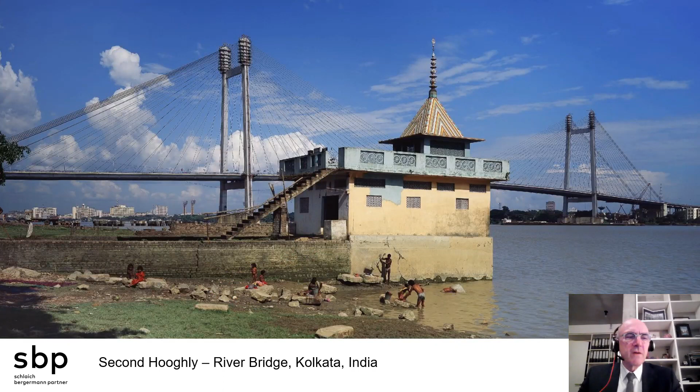You see it on this slide, India's first cable-stayed bridge, back in 1988, together with many Indian colleagues. He also designed the second Hooghly Bridge in Calcutta, now called Vidyasagar Setu. At the time, it was the longest cable-stayed bridge in the world and the first with a steel concrete composite deck. My father took me with him when I was a boy to see the site in 1976.

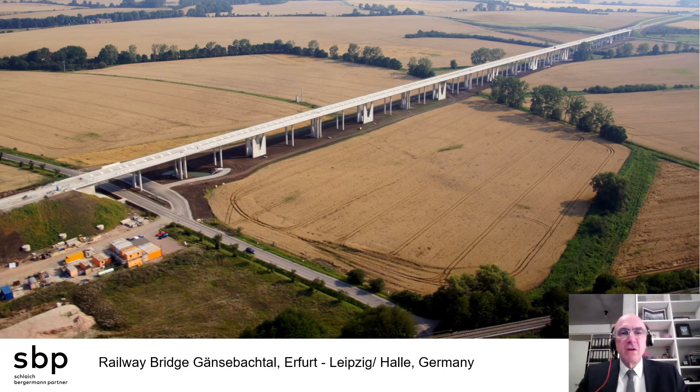We have worked on numerous high-speed rail bridges. Because of German unification, the country had to be stitched together again, and therefore numerous bridges like that had to be built, all concrete, integral, no joints, no bearings, so very durable, slender bridges that obstruct the view as little as possible. Here's another example of one of these integral bridges.

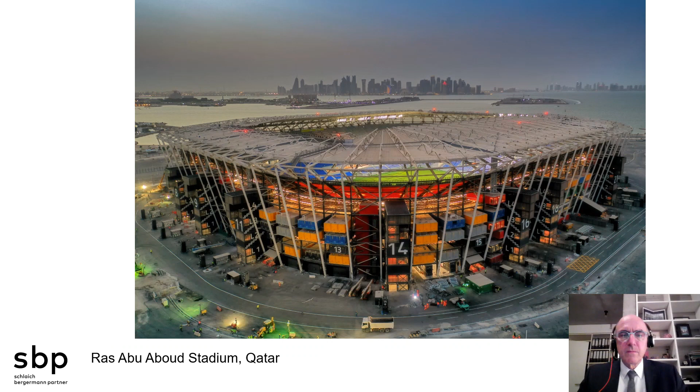There's never standstill, and we are constantly trying to improve sustainability of stadium projects, so that there is legacy. Here's a very nice example of a very recent stadium project for Qatar, for the Soccer World Championship next year in 2022. This stadium is completely made from containers. Containers are brought to site, materials in the containers, and it's used to build the stadium. After the event, everything can be put back into the containers and shipped elsewhere to build another stadium in another place. This is the idea.

I have mentioned solar energy production already, and again, this started with my father's idea. He wrote a little booklet in 1989 titled 'How Much Desert Does a Car Need?' Already at that time, he had thought about using solar energy from the deserts to feed the hungry cities of the world. Ever since then, in our office, we have a department that works on solar thermal power plants, or PV, photovoltaic power plants. This is also a very exciting field for structural engineers, because there is a lot of structure involved to carry mirrors or to carry PV panels.

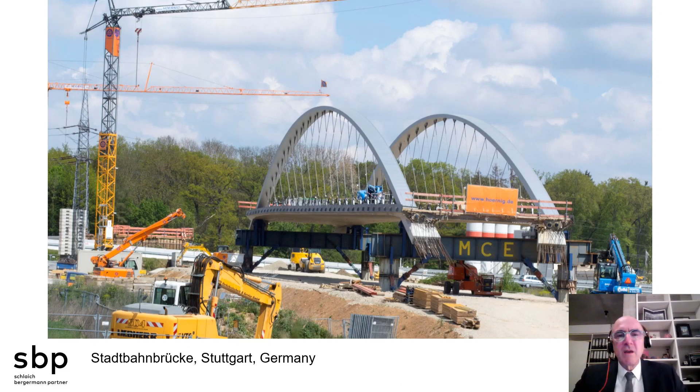We are also investigating the potential of pre- and post-tensioning concrete with carbon fibers. This is done today with steel, but there's the issue of corrosion. If concrete is stressed with these very high strength carbon fibers, which are much stronger than steel, corrosion is not an issue anymore. You need less concrete cover, and therefore these elements can become lighter than conventional ones. You save resources, and the bridges become more elegant.

Now we are trying to make the precast elements even smaller, producing very small concrete components, perhaps only 1 or 2 tons of weight. Naturally, if you put them together you have many joints, but since the stressing material holding these elements together does not corrode, joints where water might get in are not such an issue. So we're working in these areas to see how we can speed up production and construction.

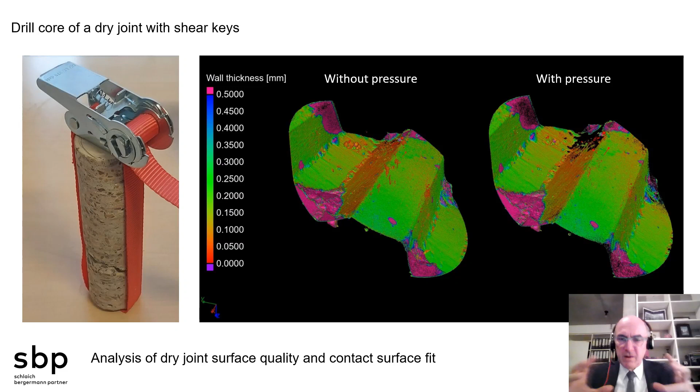This is another example. Two elements are stressed together in a simple way, and with and without pressure the contact surface changes. Again, computer tomography allows us to see how much contact we really have between elements that later have to make sure the bridge works, because these elements, later bigger, will become members of a bridge.

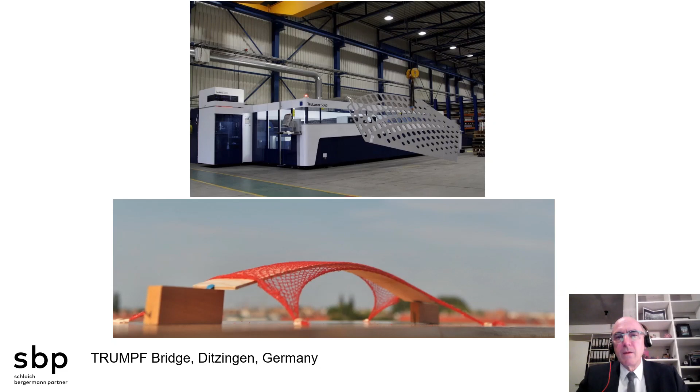The result is a very lightweight shell bridge that can be walked upon directly, very transparent and very stiff due to its double curvature - 30 meters long and only 20 millimeters thick. The holes are not absolutely necessary, but as we've seen before in the model, they show the flow of forces and the distribution of principal normal forces in the shell. So in that sense, there's some didactical quality in this bridge also.

I hope I could give you a quick overview of my work. Civil and structural engineering is a wonderful profession where we can improve our quality of life. It is a vast field of possibilities, from building lightweight bridges to roofs and solar power plants, and there's room for research with new materials and technologies to further improve our built environment.

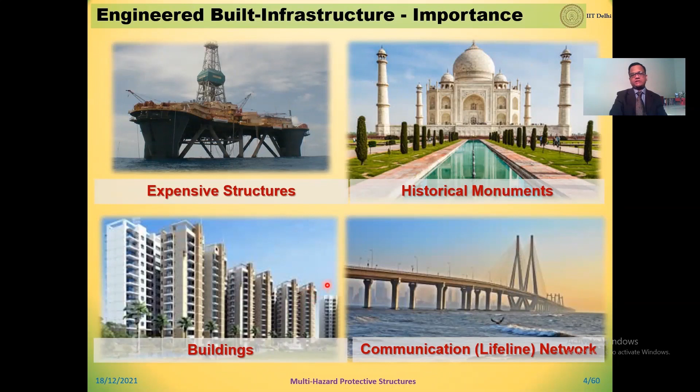Typically, civil engineers, particularly structural engineers, build some of the iconic structures of national importance, for healthcare purposes, or for transportation purposes. This is called the engineered built environment or engineered built infrastructure. I need not separately emphasize the importance of such structures in our daily life, as well as their importance in terms of helping the network, the shelters we receive, and the energy we receive from structures that civil engineers build.

In particular, some of these mega structures' failures are quite devastating, and it might lead to catastrophe in a particular area if some failure occurs. So the importance of these structures cannot be overrated.

However, what we have seen in past events, particularly in India during some infamous earthquakes, is that non-engineered structures have experienced a lot of devastation and destruction, with collapses experienced in this non-engineered built infrastructure.

However, if we look at engineered infrastructure as well, unfortunately there too we have seen, especially during the Bhuj 2001 earthquake, that a number of reinforced concrete structures, which fall in the category of engineered built infrastructure, have collapsed. Not only that, even in other parts of the world, such as in Haiti during the 2010 earthquake, one can easily see that a number of structures have collapsed, and they were actually engineered built infrastructures.

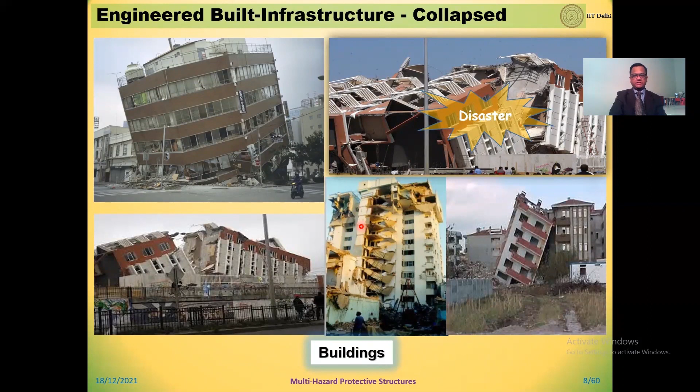So if we look at the past experience of how the built infrastructure has survived or performed during past earthquakes or similar hazards, we see there are a number of failures experienced, whether in building structures, towers, or lifeline structures such as water storage tanks, where effects of earthquake or ground shaking have caused elephant foot buckling, diamond foot buckling due to sloshing, and failures at the top of the tank.

If we talk about lifeline structures such as bridges, even in seismically developed countries such as Japan, we have found that during and after the earthquake, built infrastructure, especially lifeline structures and bridges, has experienced a number of failures, which has hampered rehabilitation activities that are important after any catastrophe or hazard such as an earthquake.

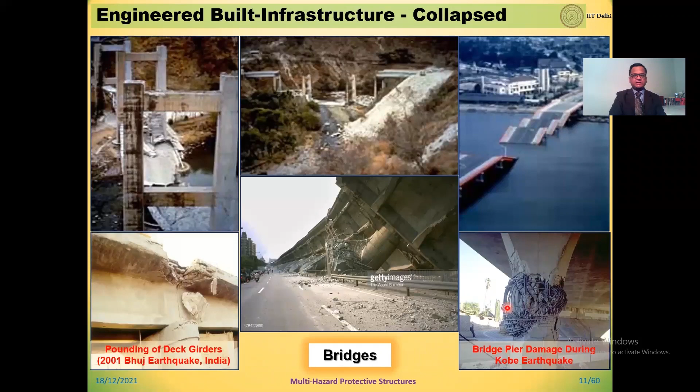Even in the Indian context, during the 2001 Bhuj earthquake, it was found that structures experienced failures similar to those seen during past earthquakes. As you can see, even in other seismically developed countries such as Japan, bridges have experienced significant damages, and some of them have actually failed.

With this background, at IIT Delhi we have focused on protecting structures from the multi-hazards that a structure would experience during its service life. Now, it is argued that wind engineering, earthquake engineering, blast engineering, and fire engineering are independent disciplines in themselves, each requiring rigorous investigation in their respective research problems.

However, our focus is on the structures. During the service life of just one particular structure, it may experience different kinds of loading, emanating from either wind, earthquakes, or man-made or accidental hazards such as blast and fire. Therefore, we have focused on one structure or structural system, with particular materials used therein, exposed to different kinds of either natural hazards or man-made or accidental hazards.

In addition to that, we use some energy dissipating devices in the structures. Typically, we design these kinds of systems for controlling the response of the structure against one particular hazard or one particular dynamic excitation.

However, performance of the structures which are equipped with these kind of devices under some other dynamic events or dynamic loading is typically not looked into, and that is one of the reasons they may not perform as anticipated during those other kinds of excitations. For example, if during ambient conditions the building is subjected to some vibration because of construction activities going around, these devices which have been put in place in the buildings or other structures, we typically do not look into how their behavior has been.

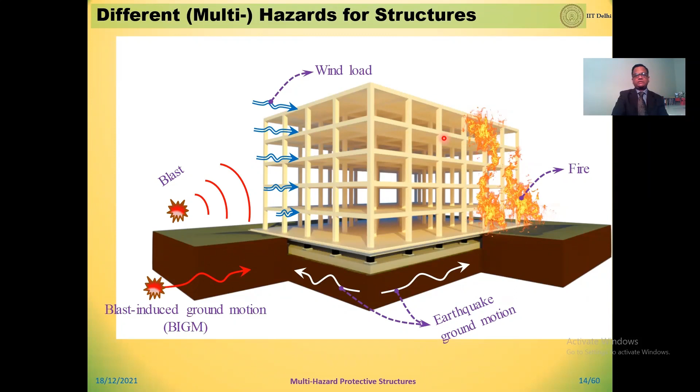With this, we have looked into defining a research problem around this to address this need of finding out the vulnerability and the risk associated with the built infrastructure when it is subjected to different kinds of hazards. And those hazards we have quantified at a particular location, and therefore what we have investigated is the site-specific and scenario-based analysis and design of the structures subjected to different kinds of multi-hazard, and finding out if the desired factor of safety is achieved during its service life or during its design life.

For that matter, we have considered some prominent hazards in our investigation, such as earthquakes, wind, and accidental hazards, blast and fire. It is also important to note that a number of new materials are being introduced for built infrastructure, and it is important to investigate their performance when they are exposed to some of these kinds of events.

Also, the structural systems, the built form or the shape of the structures are also being very different in nature. For example, there are some long cantilevers with larger spans being built even in seismically prone areas. So these are some aesthetical architectural requirements, and as a structural engineer, it is essential to meet some of those requirements of building the structures.

If we look into the effects of these different hazards on structures built with advanced engineered materials, we understand that there is some interacting effect between these responses of the structure. For example, it is very well understood that in order to build blast resistant structures, more the mass, better it is in terms of blast resistance. On the contrary, if we talk about earthquake resistance of structures, lesser the mass, lesser is the inertial forces that it will attract.

It means that there are contradictory requirements in the design of earthquake resistant structures and blast resistant structures. On similar lines, if we compare between the demand of earthquake resistant structures and wind resistant structures, typically if we elongate the time period of the structures, it means if we make them more and more flexible, then the earthquake response can be reduced down. However, flexible structures, as we know, are more prone to the wind hazard when they are exposed to wind load.

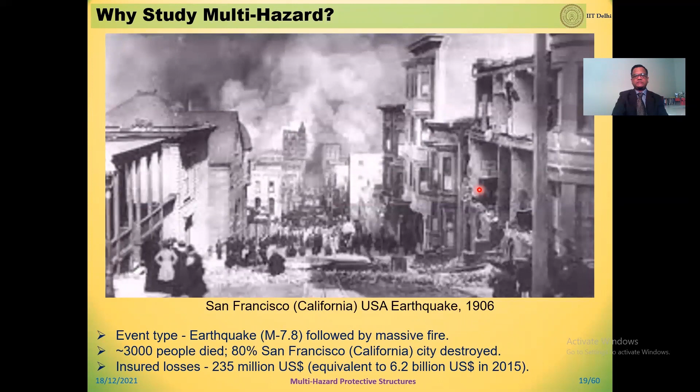This is because of the cascading effect of both these hazards, earthquake and fire. However, we are yet to learn the lesson. In 1994 also, during the Northridge earthquake, a number of such incidences were seen where earthquakes have occurred. A structure, if designed properly, may perform satisfactorily under earthquake excitation. However, when it is subsequently subjected to loading from a fire event, it may not have the same performance as the intact or undamaged structure. So that kind of philosophy is required in our design practices.

All of us have experienced or seen the Fukushima Daiichi nuclear disaster in 2011. There were a series of hazardous events, starting from earthquake, then tsunami, then fire hazard, and then of course the nuclear disaster.

Apart from that, in 2015, the I-10 bridge connecting California and Arizona states failed because of two subsequent events: heavy rains that followed Hurricane Dolores, and because of the heavy rain there was flooding, and because of the flooding the riverbed material was washed away, causing scouring, which led to the falling of one of the spans in this bridge.

If we look closer into these kinds of problems in bridge infrastructure, what we observe is, for example, the as-built structure during the design stage has a pile cap which has been designed, and beyond that there is a pier and then a pier cap. Now, the length considered for the design by the structural designer might be from the pile cap up to the pier cap.

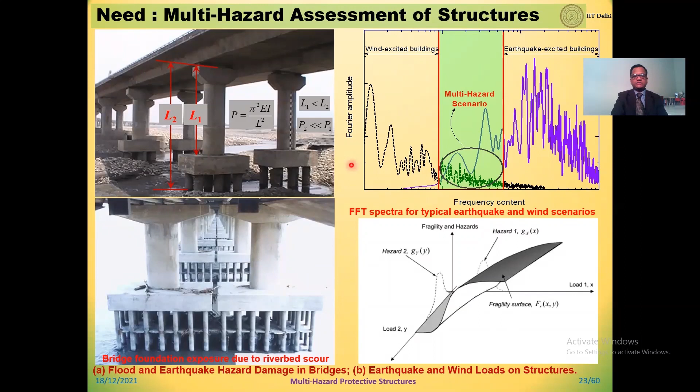Apart from that, there are some other accidental events, such as the blast that happened in Dombivli, which was followed by fire, and here 47 people died and more than 200 were injured. Again, this is a fire-following-blast kind of event that took place in a Mumbai factory during 2016.

Also in 2016, on the southern coast of America, in Florida, structures experienced heavy wind loading, then there was a storm surge followed by flood, and also some events of fire. In this multi-hazard event, more than 1650 fatalities were reported and a lot of loss occurred because of the multi-hazard events.

If we see accidental hazards across the world, a number of events took place, in thousands per year in different years. In terms of cost, looking at the top costliest world insurance losses, we can see that in most cases they are not a single hazard, but the top 10 costliest multi-hazard events in the world.

If we focus more on the Indian context, the National Building Code of India in 2016 has already included this multi-hazard map of India, which reports that mostly the northern part of India, bordering Nepal, especially the Bihar state, is more prone to multi-hazard risk. It has been reported that 19% of the world's land cover is exposed to a single hazard, and more than 50% of the world's population is affected because of that single hazard.

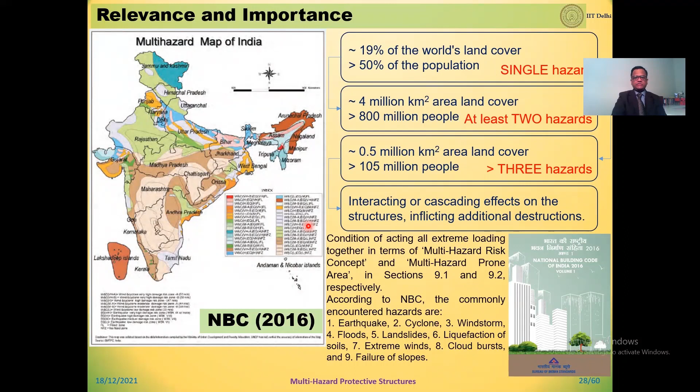However, two hazards affect 4 million square kilometers of land cover and more than 800 million people. And if there are three or more hazards, then 0.5 million square kilometers of land cover is affected, and more than 105 million people are affected. These hazards have interacting or cascading effects, and thereby we need to ensure that our structures are protected from these hazards so that we can save invaluable human life.

I would like to highlight that we distinguish multi-hazards into three categories: one, independent hazards A and B and their independent effects on a structure during its lifetime; second, triggering events such as cascading hazards; and third, simultaneous occurrence of different hazards where there will obviously be interaction. In such cases, we need to identify the challenges involved in design and how to mitigate the response of the structure subjected to these mutually interacting and interrelated effects.

In that, we need to define structural safety on some innovative scale, and this requires the involvement of structural designers, code writers, and other stakeholders in order to ensure that we have a multi-hazard resilient society.

So here, the hypothesis we make is that multi-hazard risk analysis is not just the sum of single hazard or risk analysis. If we look into other designs of structures such as dam structures or offshore structures, some of these conditions have been considered, though not so per se in the realm of multi-hazard protection of structures.

For example, during the Oklahoma City bombing, there was a blast followed by a fire. Had that building been designed using the multi-hazard concept, probably the destruction experienced might be lower, and the structure might have been usable even after these two deadliest events followed each other.

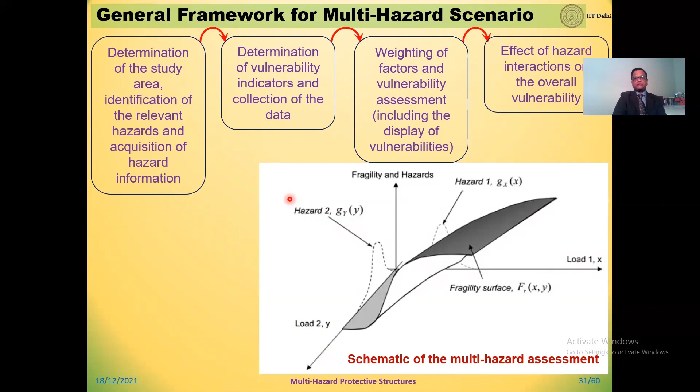So essentially, we would like to develop our structures based on the probabilities of occurrence of hazardous events to ensure we account for multi-hazardous events. In order to do that, we carry out an assessment of structures on a probabilistic scale to check how fragile they are for different kinds of events.

In that context, at IIT Delhi, in the multi-hazard protective structures laboratory, we have developed some analysis frameworks and procedures, and some of them I will quickly highlight.

For example, we have considered some multi-story mid-rise to high-rise buildings, subjected them to site-specific earthquake scenario events and some wind loading events, and checked their responses, whether they are prone to failure, and what the probabilities of failure are.

We started with a fundamental understanding of the single degree of freedom system response when subjected to earthquake or wind kind of loading. I say wind kind of loading because we considered sinusoidal excitation, categorized into base excitation and mass excitation. However, while inputting these excitations, we ensured that the total energy imparted to the structures is more or less the same.

So as you can see in the time history, the total energy imparted on the structure is similar. However, the response of the structure is much different. Now, if we talk about designing a structure against earthquake versus against wind, its response for similar input energy is significantly different.

If we look at this on the stochastic scale and check the fragility of the structures, it is seen that they are more fragile to base excitation relatively compared to wind excitation. So we took intensity parameters such as excitation frequency, peak acceleration, and mean wind speed, and where external excitation frequencies changed, we found that their vulnerabilities are significantly different from one another.

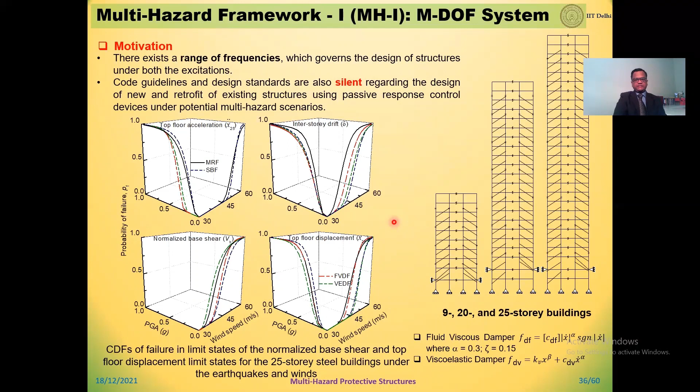If we see the vulnerability on a similar scale in terms of either top floor acceleration, story drift, or top floor displacement for different intensities of earthquakes and wind, either with or without energy dissipation devices, we again see significant difference in terms of performance. However, typically we do not design structures to take care of both response reductions simultaneously, for earthquake loading and wind loading.

We have found that there is a bandwidth of frequencies within which multiple hazards affect structures, and structures whose frequencies lie within this bandwidth are more susceptible to different kinds of aerodynamic events. We have analyzed some real-life industrial structures and seen that providing bracing or not significantly changes the response of the structure.

In yet another real-life study, we proposed a new analysis procedure to analyze the performance of a real-life base isolated structure built in the Aichi prefecture in Japan. This base isolated building is about 4 stories high, with base isolations provided at the bottom, in the basement floor. We have taken into account the non-linearities in the isolation system and modeled a 3D base isolated building.

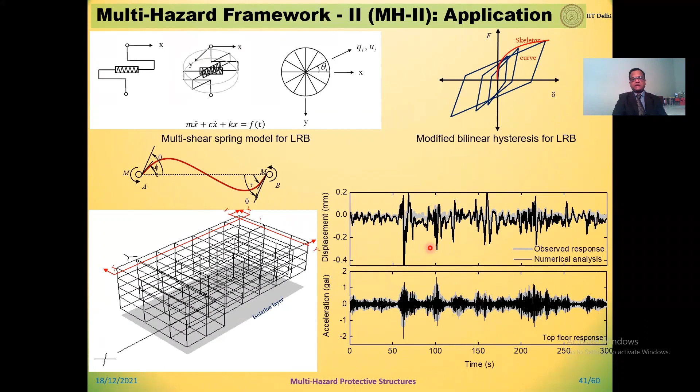First, the data available for measuring the response of the building, which is being continuously monitored there, was compared with our simulation results, and we were able to predict the response of the structure under the action of both earthquakes and ambient wind.

Then we developed a framework for generating a timeline of earthquake and wind events during the design life of the structure, obviously based on probability. We developed it for the first hazard, say earthquake, and similarly repeated it for the second hazard, which is wind.

While developing these time histories for the design life of the structure for earthquakes and wind, since it is a random problem with different possibilities, we considered some of these cases to simulate the wind loading and earthquake loading on the structure happening at different durations, depending on the return period considered.

So this is the designed structure as built initially. Over a design period of, say, 100 years, we subjected it to some wind events and some earthquake events in different cases and intensities, and checked how these multi-hazard events affect the probability of failure of the structures.

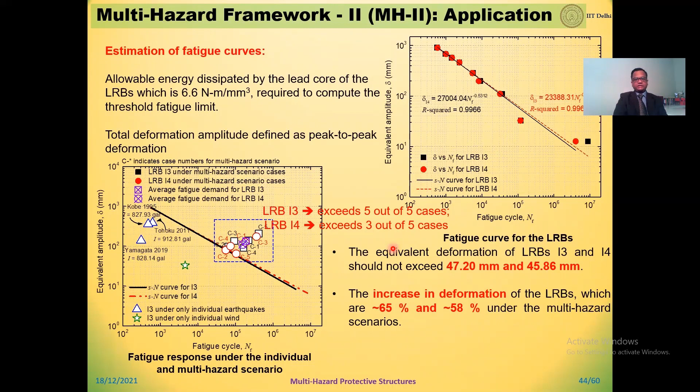This revelation led us to the conclusion that these isolation systems incorporated in the structures may not perform as designed, especially after a few years of their installation.

For example, here we are seeing the displacement of the structure against the earthquake and wind, site-specific earthquake and wind. In the case of wind, there is of course a zero non-wind oscillation, and thereby the force developed in the isolator is not comparable with that in the case of earthquake. So the full development of the force-deformation loop has not been possible in the case of wind.

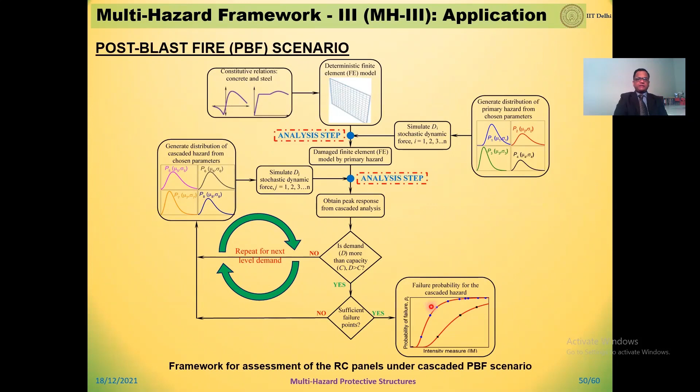The other multi-hazard problems we have solved are, for example, fire following earthquake or fire following blast. First, the post-blast fire scenario: we developed an analysis framework wherein we analyzed structures exposed first to the blast event and then followed by a fire event, and checked how vulnerable they are, whether the events happen independently or one after the other.

This is a real-life structure that we considered. First it is subjected to blast loading, and then to some fire loading. This is a scenario definition for blast and fire events, with nonlinear parameters considered, dependent on temperature as well as rate of application of load—high strain rate parameters for the materials used in these structures.

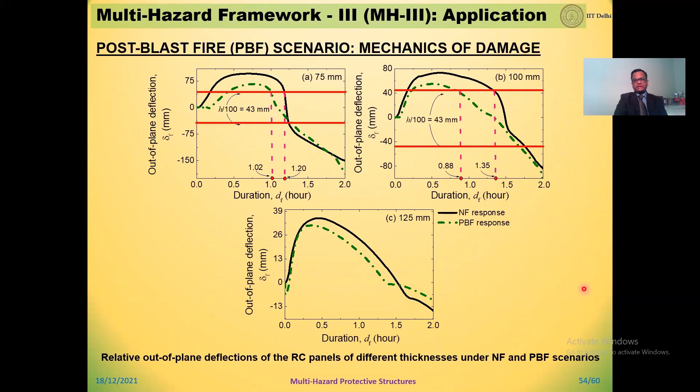What we found is that the behavior is substantially different if only one event takes place at a time, compared to a cascading post-blast fire event.

Looking at the past, earthquake-triggered fire events, there are a number of such events which have happened historically, as I mentioned earlier. In the 1906 San Francisco earthquake, more than 3,000 people lost their lives because of the fire that followed the earthquake. So we have again analyzed some real-life structures subjected to post-earthquake fire scenarios.

What we have found is if the damaged structure is exposed to fire, the response is much more vulnerable as compared to an undamaged structure. So we have found the fragility or vulnerability of structures when they are exposed to these two different kinds of events following one another.

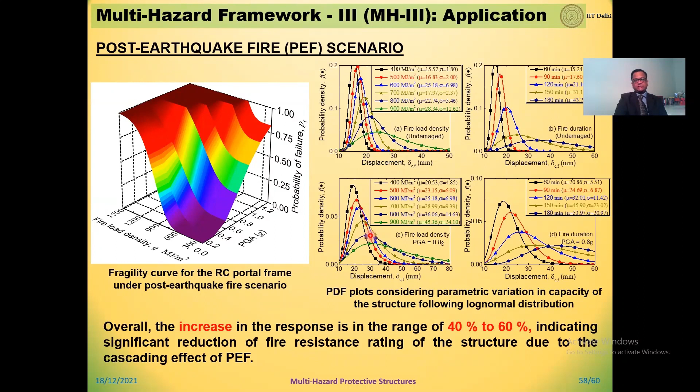The first is the earthquake, and then the earthquake triggers the fire. We have found that structures become more vulnerable if they are exposed to this cascading fire event after an earthquake. Now, conventionally, these are the analysis steps that we follow for designing structures.

However, we have augmented that with the multi-hazard loading concept, with an equivalent multi-hazard load applied on the structures in order to carry out multi-hazard analysis and design. To carry out this analysis, first we need to define the different kinds of hazards that the structure will experience during its service life, and then incorporate that into our day-to-day analysis and design.

This part of the analysis steps in structural design has been published in the Current Science journal. For details, one may look at that publication.

So we have converted this conventional structural analysis and design procedure, adding particularly the site-specific conditions and scenario-based conditions, both deterministic or possibilistic and probabilistic or stochastic. Finally, what we would like to arrive at is some multi-hazard approaches for analysis and design of structures in order to improve their multi-hazard resilience.

We have been carrying out this work at the Multi-Hazard Protective Structures Laboratory at the Department of Civil Engineering, which was established in 2009 with this name. There are a number of recommendations we have made based on some of these investigations.

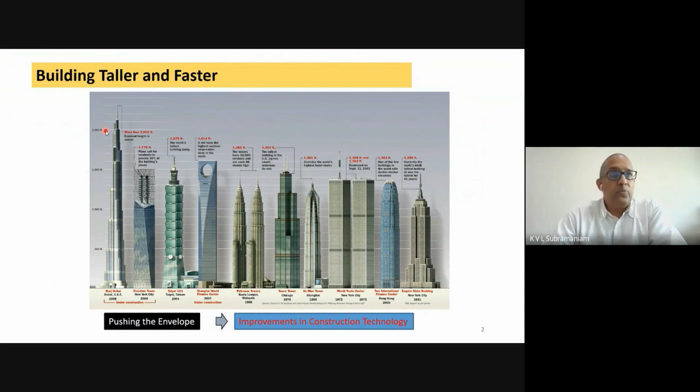Starting from the 1930s to the current day scenario, buildings have gotten taller, and this has been possible because of steady improvement in construction technology. In specific, concrete buildings have started taking a major share of super tall buildings, to the point that in 2018, 63% of super tall buildings were primarily made of concrete, with concrete structural elements and structural systems.

This has been possible because of a steady improvement in concrete technology, which has led to an increase in concrete strength. Today, we are able to deliver concrete with very high strength, which is pumpable to great heights, with steady improvement in construction techniques. As a material, concrete is sustainable and affordable compared to the alternatives available.

Now, the challenges in concrete construction today include speed. What limits fast, rapid construction using concrete is the way concrete is formed at site. Concrete is poured into formwork assembled on site, and it requires vibration and mechanical intervention to be compacted into the gaps within the formwork.

The formwork is removed after the concrete gains strength, and concrete takes the shape of the formwork. This entire process delays the construction of concrete structures due to the time required for assembly of the formwork.

The other challenge we face with concrete is that forming on site limits us to using rectilinear shapes. Most shapes that we can form on site using formwork are limited to rectangular, or where we use other shapes, it's restricted to simple shapes like I or T shapes.

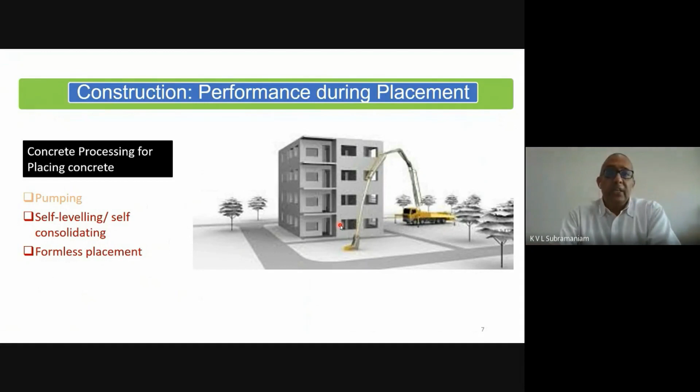Just to illustrate the advancement in pumping technology, concrete in the Burj Khalifa tower in Dubai was pumped 600 meters and delivered to be placed at that height. This required significant advancement in pumping technology and the pumps used. In addition, the material had to be engineered to withstand the pressures so that it would flow in the pipe when in a highly pressurized state, come out of the nozzle, remain in an unsegregated state, and fill the formwork.

Just to illustrate the material-level challenge in placement and forming of concrete: concrete is a suspension made of aggregate in a cement paste matrix. Aggregates themselves are graded - we have coarse aggregate and fine aggregate which pack to produce a dense matrix, and the gaps between the aggregate are filled with cement paste. The cement provides the glue which bonds the aggregate together when concrete hardens, producing a structural material because of the chemical reaction between cement and water.

So if you look at the flow property of concrete, we need to look at the rheology of the paste. Cement paste is the medium, the matrix in which the aggregate are suspended. So we also have to look at aggregate packing. By engineering these two, we should be able to produce concrete with the desired flow property.

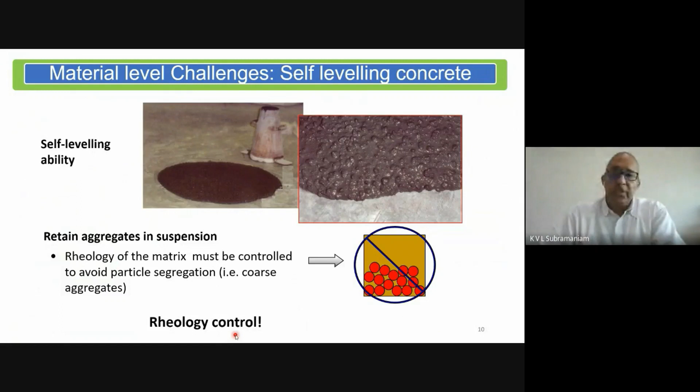To produce concrete with self-leveling ability requires concrete to flow under its own weight. The biggest challenge is to have concrete that flows while keeping aggregate in suspension. And of course, that calls for rheology control of the binder paste and attention to packing of the aggregate.

Coming to rheology of the cement paste, this plays a vital role in determining the flow of concrete. The rheological properties of the cement paste are obtained by studying its shear behavior. When cement paste is sheared, we need to understand the flow behavior - what is required to initiate flow and then to sustain the flow. When cement paste is sheared, it exhibits a response where initially, as shear strain is applied, it offers resistance, and the resistance to increasing shear strain increases up until it reaches a maximum, identified as yield stress. If strain is increased beyond the yield stress, the resistance decreases, and eventually it attains a steady state.

The increase in resistance from the cement paste occurs because cement paste is a suspension of cement grains and water. The cement grains often exist in a percolated network, which offers resistance to the applied shear. Initially, on applying shear stress, the percolated network densifies and offers increasing resistance to applied shear strain. Eventually, once the applied strain exceeds a threshold value, the network is disrupted, the resistance from the internal structure is overcome, and we get flow within the cement paste.

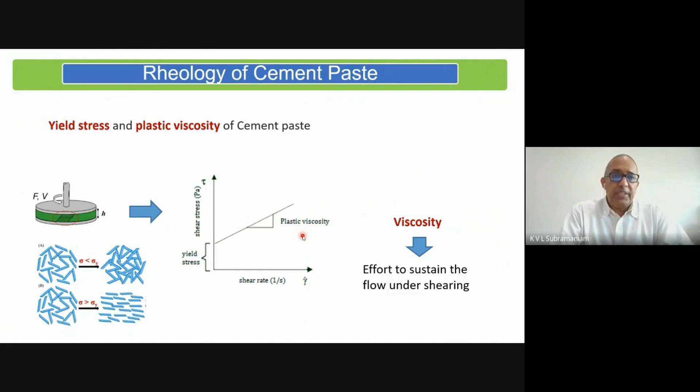Viscosity defines the effort required to sustain the flow in a fluid medium. In this case, we are dealing with cement paste, which is a particulate suspension of cement grains in water. Now, viscosity and yield stress play roles in the different conditions of the concrete.

So when we have an aggregate held in suspension of cement paste, and if the concrete is in the at-rest condition, considering the equilibrium of forces, the restoring force for the aggregate comes from the yield stress of the cement paste. The yield stress of the cement paste provides the force that keeps the aggregate in suspension when the concrete is in a static or at-rest condition.

When the concrete is in flow, in the dynamic condition, the drag force which comes about from the viscosity of the cement paste comes into play in the equilibrium of the aggregate particle. Therefore, both yield stress and viscosity become important in determining the state of the aggregate in suspension when the concrete is at rest or in the flow condition.

Of course, we can manipulate the yield stress of the cement paste using engineered polymers known as high-range water reducers, which typically have a backbone and a comb teeth-like structure. These adhere to the cement grains and essentially create a deflocculation of the cement grain structure through physical or steric repulsion between the grains, allowing us to induce flow. The effort required to produce flow in cement paste is reduced significantly with the addition of water reducers.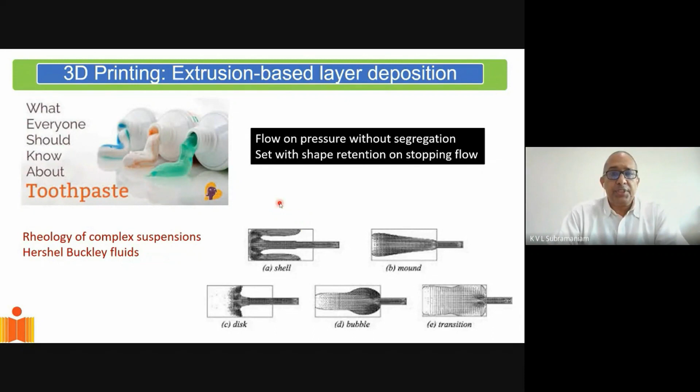Now, extrusion-based printing of concrete would require a balance of three terms. First is pumpability, where the concrete should have the ability to be pumped out of the pipe without clogging and segregation. This requires that the concrete itself should have low viscosity and it should not allow phase separation. The material should remain homogeneous under pressure.

It should allow shape retention. Once it comes out of the nozzle, it should keep the shape with which it was extruded. That requires concrete to have a high yield stress and thixotropy.

Then it should allow buildability, which means it should allow stacking of layers one on top of the other to assemble the entire structure. This means the internal structure should build up very rapidly within the material once it has been deposited. So to do this, we need a material with high yield stress, low viscosity, and high thixotropy. These are the three rheological properties that have to be balanced in the concrete.

Just to illustrate, we need a material with high yield stress and low viscosity. The effort required to initiate flow should be high, so it will keep its shape once extruded. Then it should have low viscosity so that while it's being pumped, it's able to be pumped with low effort.

And then it should allow stacking of multiple layers. That means the lower layers which have already been deposited, the structure development in those layers should allow them to take the weight of additional layers coming on top.

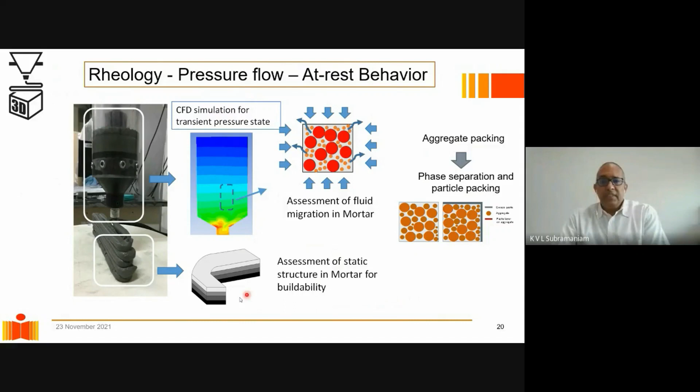And once the material has been deposited, we require the internal structure to build up to be able to sustain the weight of additional layers.

To achieve this build-up, we have to look at the property called thixotropy. Thixotropy means once we shear the material and hold the shear stress constant, the structure breaks down. The resistance of the material breaks down because it gets deflocculated. Then if we remove the shear stress, the internal structure should build up and start offering resistance to shear stress again. Materials which are thixotropic are able to build up very rapidly after applied stress.

We found that nanoclays help us improve the thixotropy of cement paste. If added in small quantity, at rest the nanoclay exists in a very flocculated structure. When sheared, the flocculated structure breaks down, so it doesn't impact the viscosity, it flows. Once it is again brought to rest after shearing, it is able to build up the structure, which allows the material to withstand shear stress again.

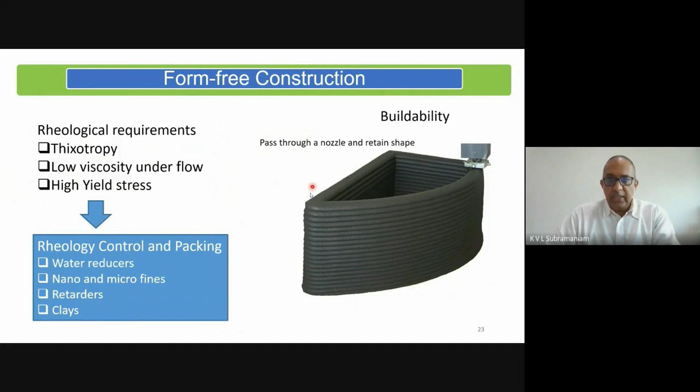With this, we were able to develop concrete mixtures with an understanding of the rheology and packing of aggregate within the mixture, which could be printed by layer deposition. This is an example of a structure printed to 1 meter height, made with aggregate in suspension in cement paste — a 3D printed concrete structure with a complex shape.

So I would like to conclude by saying concrete for improved requirements of delivery and placement requires engineering which considers multi-scale linking between paste and concrete rheology. Rheology control of the binder paste is essential to deliver or control the flow behavior of concrete. Then multi-phase analysis, which includes packing of solids, is required to engineer concrete with the desired flow characteristics. Thank you.

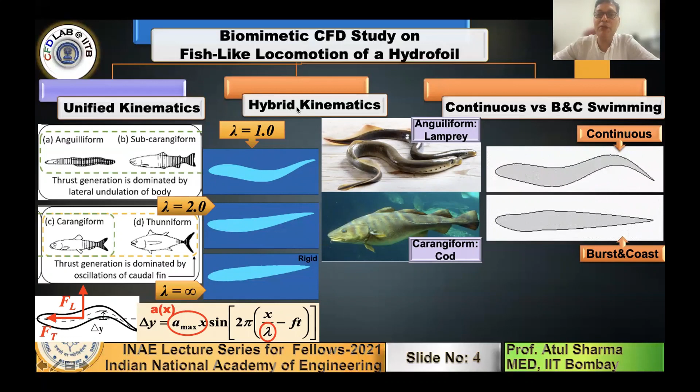In nature, carangiform fishes—the thicker fish type—have been found to swim differently when traveling long distances to save energy. This is called burst and coast swimming: they undulate their body for one cycle, then rest for one cycle, then undulate again, creating alternate acceleration and deceleration. This leads to energy saving over long distances, although it increases travel time. I'll present results for unified kinematics, hybrid kinematics, and continuous versus burst and coast swimming.

We have also compared the flow patterns corresponding to the low lambda undulating motion and the larger lambda pitching motion, where the larger thrust coefficient corresponds to stronger vortex generations.

In CFD, we generate movies where the actor is the velocity and vorticity, or the pressure. The characters of these fluid dynamic movies are phenomena like boundary layer, flow separation, and vortex formation. We try to correlate this scientifically exciting movie with an engineering relevant movie to make up a story that has both scientific and engineering relevance.

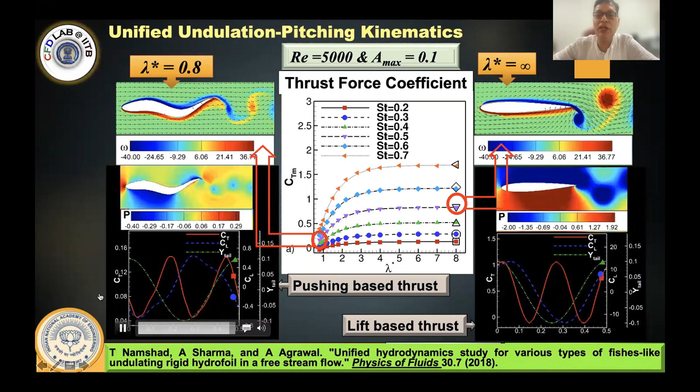For the hybrid kinematics, it has been found in nature that carangiform fishes use lambda equals 1 for body undulation. Anguilliform fishes normally use lambda equals 0.65. But as per need, when it has to increase speed, anguilliform fishes increase lambda from 0.65 to 1.

So here we are studying adaptation of the lambda and amplitude envelope separately as well as together. Since anguilliform fish are thinner and carangiform fish are thicker, we have taken data from the literature where people have experimentally documented the ratio of thickness to length, and we have mapped those fineness ratios with appropriate thin and thick NACA hydrofoils, as shown here.

We have considered adaptation for anguilliform fishes using lambda equals 0.65 with this amplitude envelope. When you consider ACA, this means anguilliform fish is using a larger lambda. When you have ACC, it is using the envelope of the carangiform fishes, using both the amplitude and wavelength of the carangiform fishes.

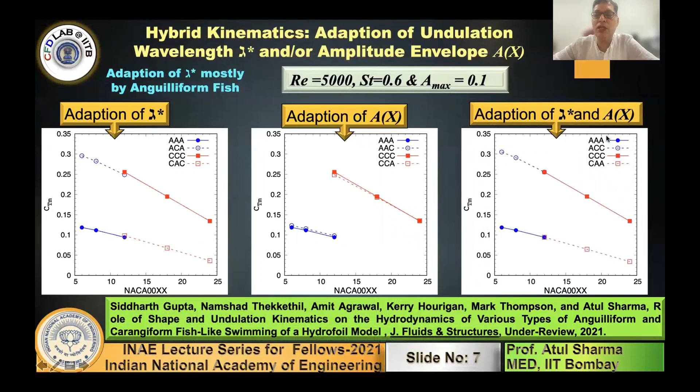However, when you vary the amplitude, we have considered along with lambda the variation of amplitude envelope also, adaptation of amplitude. When both types of fishes adapt the amplitude of the other fish, it is seen that there is almost no change in the thrust coefficient. So when you consider the adaptation of both, this result is very similar to the adaptation of only lambda star.

So this was about the thrust force coefficient, but if you consider the efficiencies, although the anguilliform fishes have a larger thrust coefficient, you can see that when it adapts the lambda of the carangiform fishes, there is a decrease in the propulsive efficiency. So the adaptation for the anguilliform fish leads to increased thrust. Momentarily it can get a larger speed, but there will be a decrease in the efficiency, so it has to spend more power.

We've also plotted the variation of the velocity vectors and the vorticity contour. This is a case corresponding to lambda equals 0.8, corresponding to the undulating hydrofoil. And this is the fluid dynamic movie for the velocity vectors and the vorticity contour for a pitching motion. You can see that pitching motion leads to stronger vortices and a larger propulsive velocity.

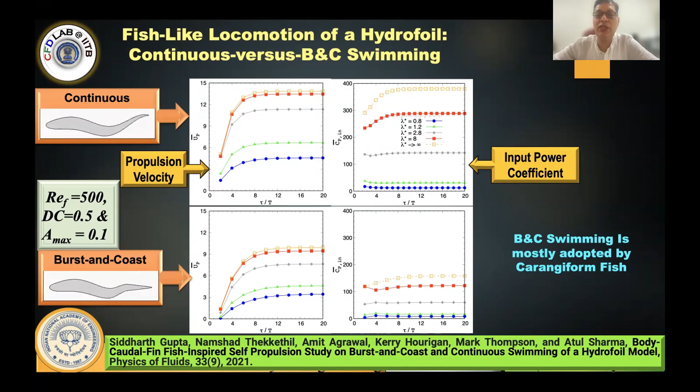However, we have found that there is a much larger decrease in the input power coefficient compared to the decrease in the propulsion velocity by doing the burst and coast swimming. For lambda equals infinity, we found a 60% decrease in the power coefficient as compared to a 30% decrease in the propulsion velocity. So when the burst and coast swimming is adopted by the carangiform fishes, it saves substantial energy, although there is an increase in travel time due to the decrease in propulsion velocity.

So although 2D simulation had a lot of limitations, we have demonstrated the natural observations through our simplified cases of simulations. Moreover, we considered a more realistic 3D simulation for a fish which is like a batoid, as shown here. So it has a wing which goes up and down.

So we have considered an ellipsoid model corresponding to this. We have considered the top view of this fish as an ellipsoid. The frontal cross section is like a hydrofoil, and if you consider the streamwise cross section, it is like a plate doing a flapping motion. And the kinematics we have modeled as shown here. You can see that the various frontal cross sections are hydrofoils doing undulating motions. If you consider a streamwise cross section, then it is shown like a flapping motion.

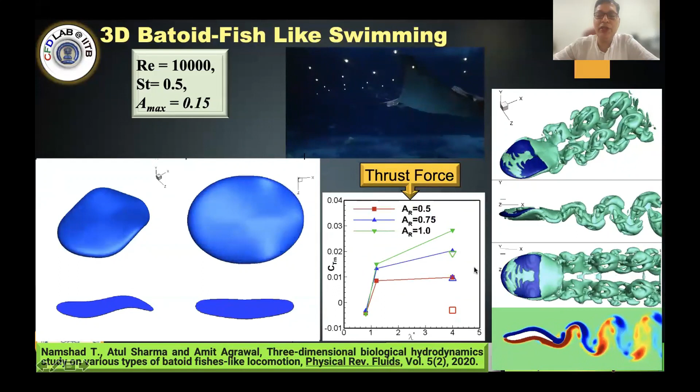For this 3D simulation, we've also plotted the vorticity patterns and also obtained the variation of the thrust coefficient for varying lambda.

The title of the technological contribution is CFD study on radiator fan assembly of a power transformer.

We have found that horizontal blowing is more efficient than vertical blowing in dissipating heat from the radiator assembly, as less air gets wasted from the sides. So we have demonstrated that horizontal fan flow is better than the traditionally used vertical fan flow.

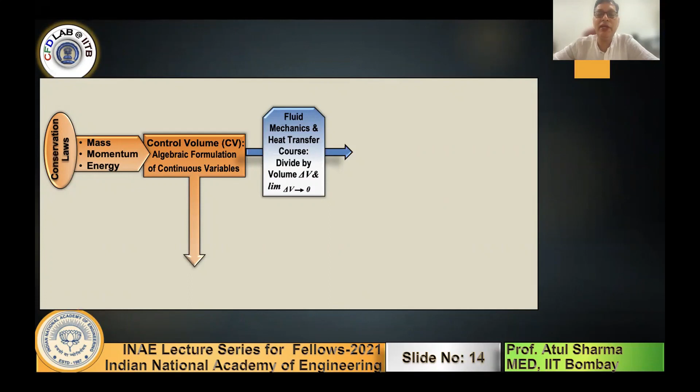The title of the academic contribution is Physical Law and Discrete Math Based CFD. In fluid mechanics, we start with the conservation law and apply it to a control volume. Then we take the limit as delta x, delta y, delta z tend to zero, and finally obtain a governing differential equation.

If you see all the books in CFD, they start with this governing partial differential equation, apply the Gauss divergence theorem, and use continuous math based approximation to derive linear algebraic equations, which are the governing equations in CFD.

So I have authored a book in which I propose using a physical law instead of the partial differential equation, and a discrete math-based finite volume method. I show that we can derive the same algebraic equations from the conservation law using a discrete form of the conservation law and discrete math, obtaining the same set of linear algebraic equations.

With this, I have tried to make this subject more physics and less math, so that it is easy enough to be taught at an early undergraduate level, to enable making CFD software in India.

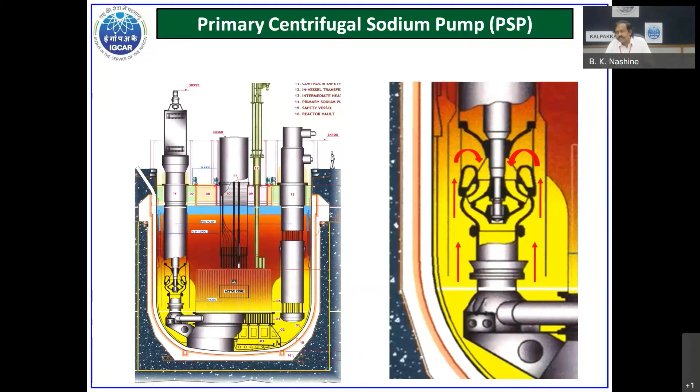Development work was taken up in the late 80s and early 90s, primarily because of the prevailing embargo, which prevented the sale of equipment and fast reactor technology to India.

Now, the sodium pumps are quite different from heavy water pumps. In fact, heavy water pumps, used in PHWR reactors, have the benefit of Indian subsidiaries of international companies from where they can purchase the pumps. But because of the embargo, we were forced to carry out the development work on our own.

Now, the pumps operate in a limited NPSH environment, which means we have to do detailed cavitation testing. Moreover, the pumps have to be made as compact as possible because they are located in the main vessel and directly influence its size. So these are two conflicting requirements for which detailed cavitation testing has to be carried out.

I was personally involved in the hydraulic development of the pumps, carried out through detailed model studies in water. The work was done in association with Messrs. Kirloskar Brothers Limited, Pune. The work has been successfully completed. The pumps have been manufactured, tested in water, and are under commissioning in the reactor. Since then, I have developed a cavitation test facility to understand and compare the cavitation resistance of different materials in sodium, and we have also embarked on a program to develop oilless bearings and seals for pumps.

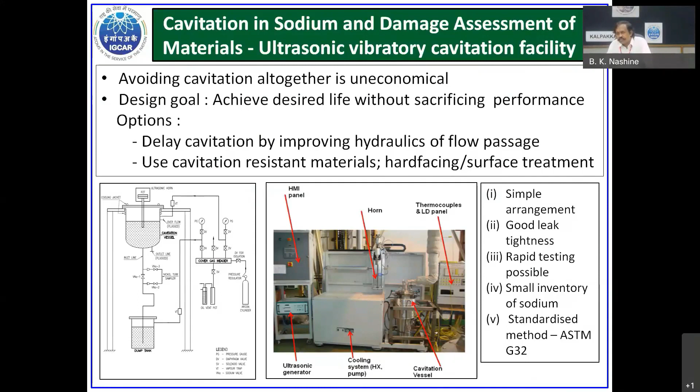We have also started a parallel program on the development of oilless bearings and seals. As I said earlier, the pump rotor is supported inside sodium by means of a hydrostatic bearing, but outside the argon cover gas, it is supported by oil-cooled bearings and mechanical seals. Although there are engineered design features to prevent the ingress of oil into sodium, there have been instances elsewhere of oil leaking into sodium. This can lead to extended shutdown of the reactor.

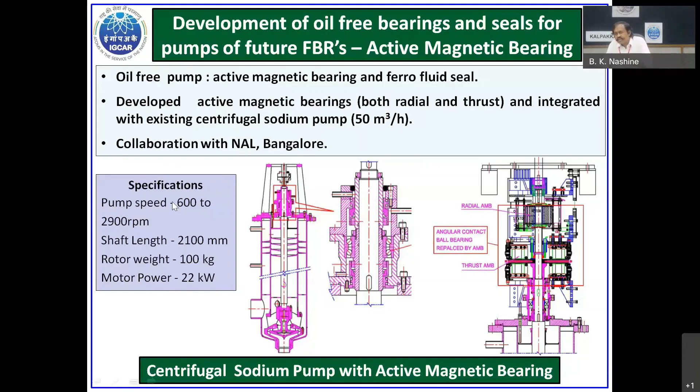As mentioned earlier, the primary pump in the reactor has to operate at an angle of inclination to the vertical because of the relative thermal expansion between the cold and hot pool. So we did rotordynamic studies on a scaled model to understand the effect of inclination on the lifting capacity of the bearing, and these tests have also been successfully completed.

In tandem with the development of magnetic bearings, we have also started a program on development of ferrofluid seals, because only then can the pump be truly oil-free. The ferrofluid for this purpose was developed in-house by the Metallurgy and Materials program, and we have been involved in the design and testing of the seals.

We are basically interested in finding out the influence of parameters such as the surface speed, the seal clearance, the effect of temperature, the effect of sodium aerosol deposition, and the volatility of the ferrofluid vis-a-vis long-term operation. So far we have been able to achieve a burst pressure of about 350 millibars in the static condition, and the system has operated well at close to 90 millibars at 1000 RPM for a period of 3.5 months. Of course, this is a work in progress, and we have understood and solved some problems, and we are continuing with it.

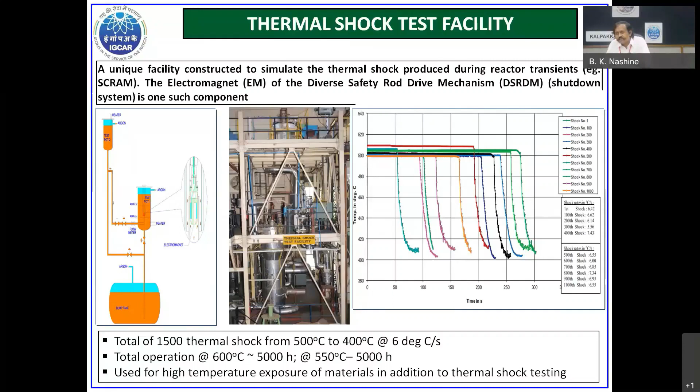Some of the major challenges we faced while testing these prototype components was that most of these components are slender and heavy, and they operate with very close tolerances. So we had to be involved in a lot of troubleshooting, which was a real experience.

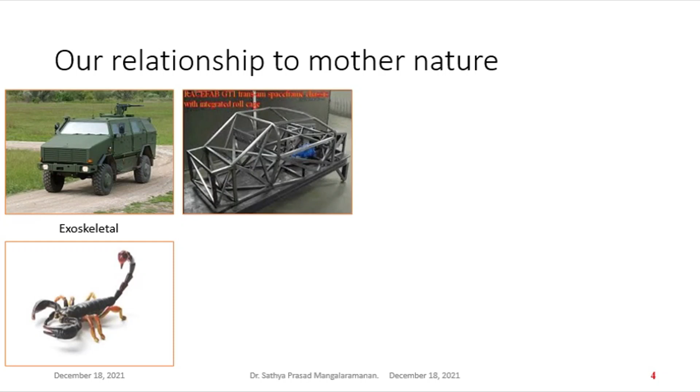Let me give some examples. We are all familiar with armored vehicles. Nature already has the concept of exoskeleton. The roll cage in a race car perhaps took inspiration from the endoskeleton in mammals. The jellyfish does not have a skeleton, and likewise our parachute. We created money with the brains that nature has given us.

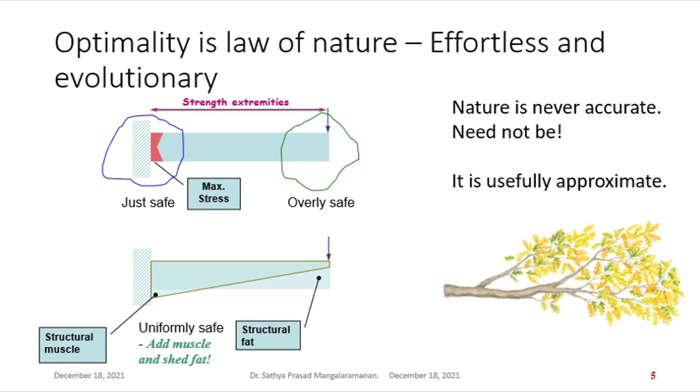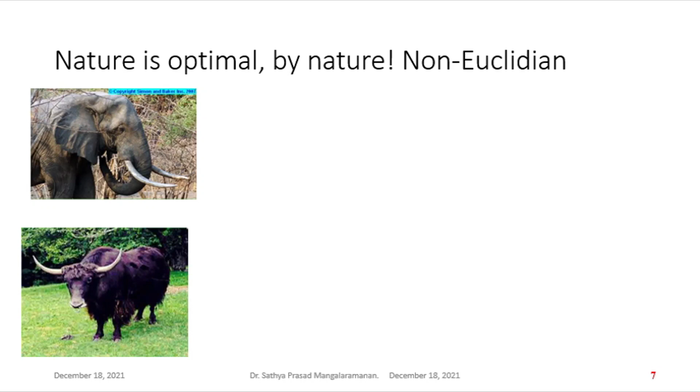Suddenly we realize that the shape of the Jarawa's bow is no different from the tusks of an elephant or the horns of a yak. Nature has again scored over us. Now we could relate that even our modern automobile leaf spring has much in common with the Jarawa's bow.

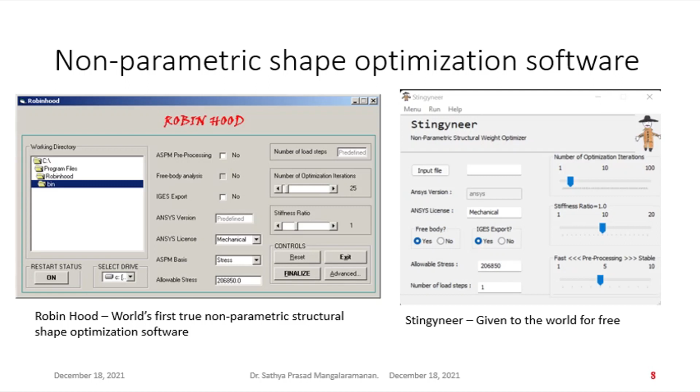I was intrigued if it would be possible to mimic nature. Our preconceived design concepts are Euclidean. Nature is hardly so. Is it possible to let a structure decide for itself on the shape best suited to serve the purpose? This research made me develop ground-up structural shape optimization theories, leading to code a software I call Robin Hood and its more powerful version, Stingyneer. Stingyneer stands for Stingy Engineer, which is a fundamental ethos for an engineer. Conserve resources. I have made Stingyneer available for free.

Optimization does not mean the elimination of redundancies. It only underscores a much better understanding of the relevance of a structure. Here again, nature scores over us. While nature has given us 2 eyes, 2 ears, 2 kidneys, etc., it has been clever in giving us only 1 stomach, 1 heart, and more importantly, only 1 brain. Imagine how confused we would be if ever we were provided with 2 brains. Nature knows where redundancy is essential and has no plans for a value engineering exercise. It has been doing its job for millions of years and hence has evolved beyond our imagination.

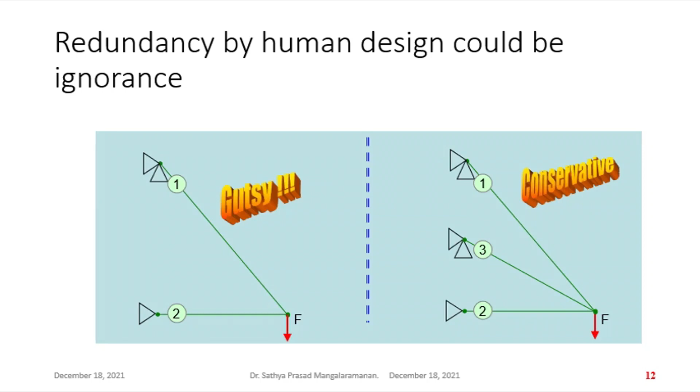But simple analysis shows that more is not merrier. The structure on the left is a stingy structure. The structure to the right has extra material, in other words, redundancy. This does not make the structure to the right automatically stronger than the structure to the left. If you look at member number 2, in both these cases, what we would have thought of as a stronger structure, that is on the right side, has 20% weakness when it comes to buckling.

I have spent several years trying to quantify structural redundancy and move designs towards what ASME boiler and pressure vessel code calls the primary stress. Redundancy must have a purpose, and that is what nature is teaching us.

Another engineering domain that continues to fascinate me is approximation. More than two millennia ago, Aristotle understood the importance of approximation when he said, 'It is the mark of an educated mind to rest satisfied with the degree of precision which the nature of the subject admits, and not to seek exactness where only an approximation is possible.'

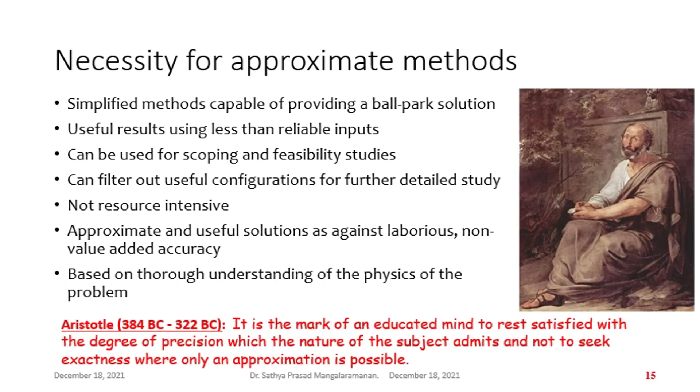My mantra in engineering is, don't miss a chance to approximate. Don't chase non-value added and expensive accuracy. Leave precision to scientists. We are engineers. Be practical.

The pursuit of approximation led me to develop simplified methods in estimating limit loads and reference volume. The volume of a structure that gets involved in, say, an event such as an impact is called the reference volume.

Some of my approximate methods were applied to the interesting problem of nuclear tube sheet design. To give you some idea, these components are more than a foot thick and almost 12 to 14 feet in diameter. Around 5 to 6,000 accurate holes are gun drilled, making the whole process cumbersome, demanding, and expensive. Even a small reduction in plate thickness would offer significant cost savings. My methods showed the potential for huge cost savings.

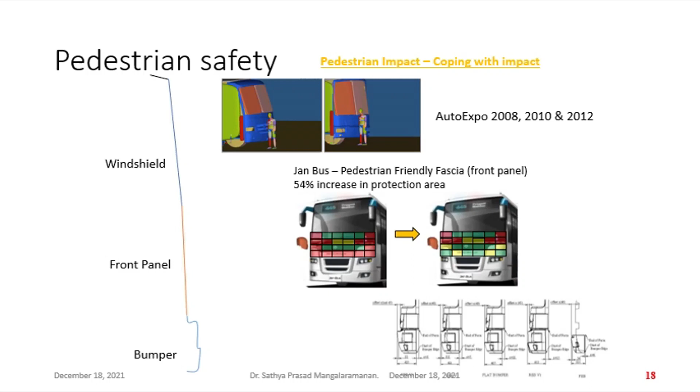In the commercial vehicle transportation sector, I have focused the earlier part of my career on pedestrian safety during impact with the front of the bus. The learnings were exciting and useful. I had the good fortune of collaborating with IIT Delhi on a joint activity called Pedestrian Safety Consortium of India, PESCI. Such collaborations between academia and industry are required to take our country forward.

I was responsible for launching India's first single tire and dual tire lift axles in the heavy commercial trucks in our country. These products have been extremely successful. All these activities have culminated into 18 patents, 16 journal and 31 conference publications.

From the standpoint of my non-engineering contributions, I have made in-depth and original research on the effect of globalization and free market on countries like India. The video is available on YouTube. Whenever I get some time, I write articles which I publish on my website. I have also self-published a book on the basics of Advaita philosophy.

Looking back, I cherish my intellectual pursuits. I herald an even more exciting future. There are lots of emerging areas like deep learning, artificial intelligence, data analytics, quantum computing, and so on. I think virtual reality and augmented reality would be playing a significant role in the future.

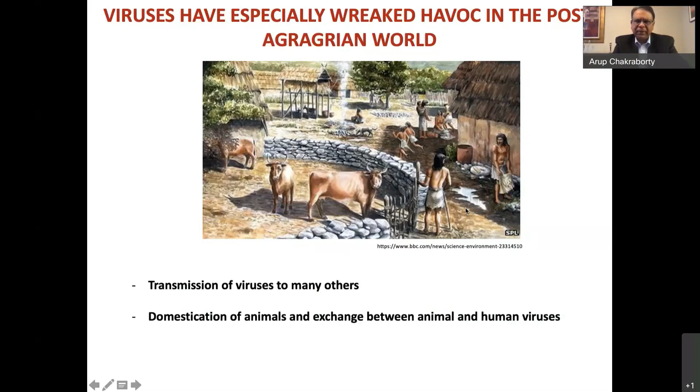SARS-CoV-2, the virus that causes the COVID-19 disease, is an example of viruses that have especially wreaked havoc, particularly since our ancestors learned how to grow crops. When this happened, they started living in large communities so they could transmit viruses to many others. And they also started to domesticate animals, and so the pool of viruses that used to circulate in animals began to circulate in humans.

The reason we are still around as a species is because we have an adaptive immune system, which is remarkable in that it enables us to mount pathogen-specific responses against a diverse and evolving world of microbes. Isn't it amazing that a person infected by SARS-CoV-2 today can mount a bespoke, tailored immune response to this virus, which evolved after this person was born?

To roughly see how this works, consider infection with a virus. When a virus infects a host cell, it hijacks its transcriptional machinery, enabling the synthesis of many viral proteins and the assembly of many virus particles that can go on to infect other cells.

B cells are important players in adaptive immunity. We have about 100 billion B cells, and most B cells have a receptor on the surface which is distinct from the receptor on the surface of another B cell. If the receptor on this particular B cell can bind sufficiently strongly to the spike proteins of this particular virus...

then biochemical reactions cause it to get activated, it starts to proliferate, and a Darwinian evolutionary process occurs, which I shall describe a bit later, which ultimately leads to secretion of soluble and even higher affinity forms of this receptor, and that's what we call an antibody.

These antibodies can then bind specifically and strongly to the spikes of this particular virus and dispose of it in a number of different ways. But antibodies attack virus particles that are free in blood or extracellular spaces.

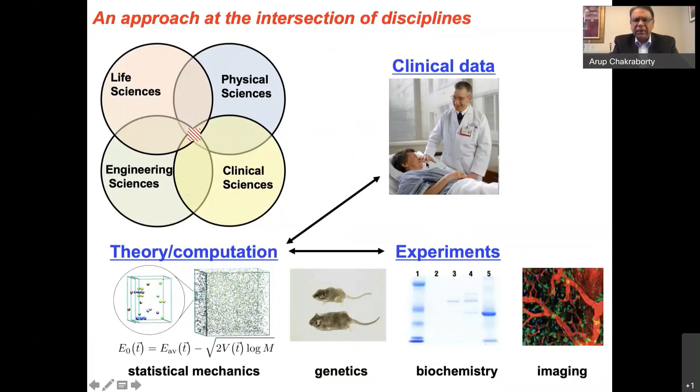Over the past two decades, we've tried to help confront this challenge by bringing together theoretical and computational approaches rooted in physics and engineering with a diversity of different biological experiments and clinical data. The experiments and the clinical work have been done in collaboration with collaborators who are immunologists all over the world.

Now, I'll give you some snippets of my work today that is focused on vaccination, which has saved more lives than any other medical procedure. Indeed, one important reason we see a light at the end of the tunnel of this pandemic are effective vaccines.

But we do not have effective vaccines against highly mutable pathogens. HIV is a prominent example. We do not have effective vaccines against different mutant strains of influenza that emerge every year, so we have to take a different shot every year.

SARS-CoV-2 does not mutate as rapidly as influenza, but if global vaccination efforts are successful, then there will be enormous selection pressure on this virus to evolve mutations that will evade these vaccine-induced immune pressures. What is required to eliminate these scourges are universal or variant-proof vaccines, and I'll give you, in the remaining time, just snippets of some of our work which represent small steps in pursuit of this quest.

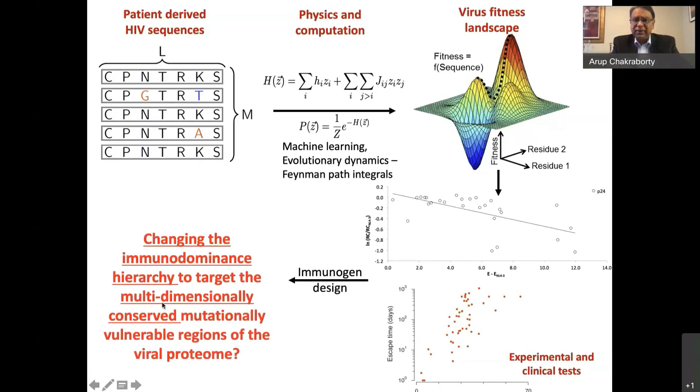And thus validated, we then went on to design an immunogen, or the active component of a T cell component of the vaccine, which is not made up of whole proteins of the virus as is typical, but only composed of parts of its proteome. These parts of the proteome are ones where it is very difficult to evolve mutations no matter what the sequence background, or what we call multidimensionally conserved regions.

The issue is whether these parts of the proteome can be delivered into humans and animals in a way that leads to a big immune response, which can be protective.

Recently, we have shown that using a platform that is the basis for the J&J and AstraZeneca COVID-19 vaccines, we can achieve this goal in monkeys, and we are now trying to move this concept forward with companies into humans using the mRNA platform. So now let me turn to the antibody arm of the problem.

Upon natural infection or vaccination, antibodies are produced by a Darwinian evolutionary process called affinity maturation. I told you that if the receptor on the surface of a particular B cell can bind sufficiently strongly to the spike proteins, it gets activated, and then it can seed structures in your lymph nodes called germinal centers.

Herein, the B cells start to multiply, but also mutations are introduced at a very high rate into the antigen binding region of this receptor. These mutated B cells then interact with the antigen, that is either the virus or whatever is in your vaccine. And if the B cell can bind sufficiently strongly to this antigen, it can eat it up.

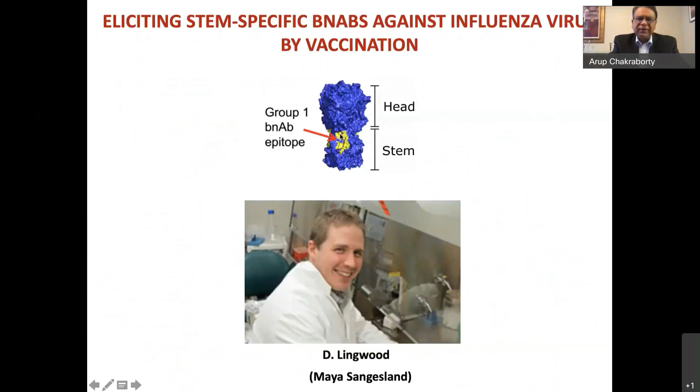We do a number of other things that focus on the antibody response, including the trillion-dollar question of what determines the durability and memory of an immune response. But for today, I hope I have given you some snippets and an overview of at least some aspects of our work that focus on developing better vaccination strategies for highly mutable pathogens by bringing together approaches from engineering, physics, biology, and medicine. Thank you very much for your attention.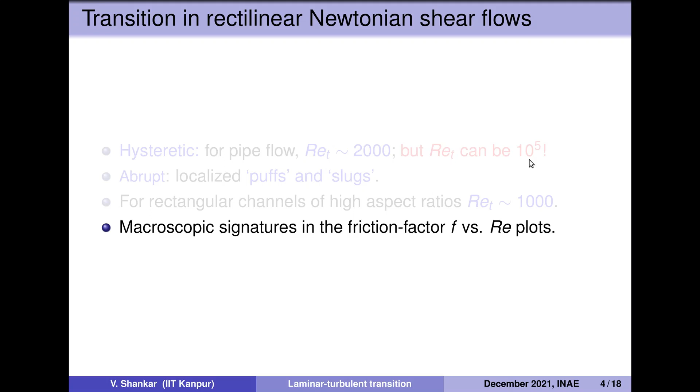Ever since the experiments of Reynolds, there have been a lot of efforts in engineering fluid mechanics to predict the transition from first principles using the Navier-Stokes equations. This has turned out to be a very tough challenge because Newtonian pipe flow is stable to small perturbations at all Reynolds numbers. This is also consistent with the earlier observation that the transition could be postponed to very, very high Reynolds numbers if sufficient care is taken.

A similar instability analysis suggests that channel flow is unstable at a Reynolds number of around 5800, but this theoretical prediction is much, much higher than the observed transition Reynolds number of around 1000. So it is now understood that the transition is dominated by nonlinear processes, and in the last 20 to 25 years, there has been a lot of development in fluid mechanics literature on how new non-trivial unstable solutions called exact coherent states emerge with increasing Reynolds number, dominating the transition.

Now, in this context, there was an important paper in 2013 from Björn Hof's group in Austria.

They carried out experiments in the flow of polymer solutions and reported a new type of turbulent state called elasto-inertial turbulence. These authors carried out experiments in flow of polyacrylamide solutions of very high molecular weight and over a range of concentrations. In their experiments, two types of protocols were followed.

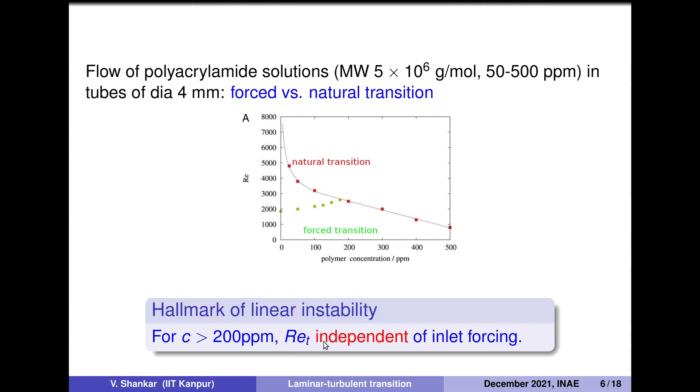One in which the transition was forced by the injection of fluid, and another in which there was no forcing. They observed the Reynolds number at which turbulence occurs as a function of polymer concentration. The forced transition occurs in the Newtonian case at a Reynolds number of around 2000 in their experimental setup, while the natural transition happens at around 8000. Upon addition of polymer, while the natural transition occurs at a much lower Reynolds number than the Newtonian value, the forced transition is stabilized, but beyond a threshold polymer concentration, the transition occurs at the same Reynolds number, indicating that the transition is independent of the forcing, and this is a hallmark of linear instability.

A similar transition was also observed by Srinivas and Kumaran for rectangular channels at Reynolds numbers around 300 to 350. These experimental observations suggested to us that there could be a universal linear route to elastoinertial turbulence in both viscoelastic pipe and channel flows.

In a slightly different area of research, we also carry out research to understand how transition occurs in flow through deformable tubes and channels of the type that occur in biological flows. Here I am showing a schematic of an artery, flow in an artery, which has soft walls due to the tissues, and our research here tries to understand how instabilities occur in fluid flow through deformable tubes and channels.

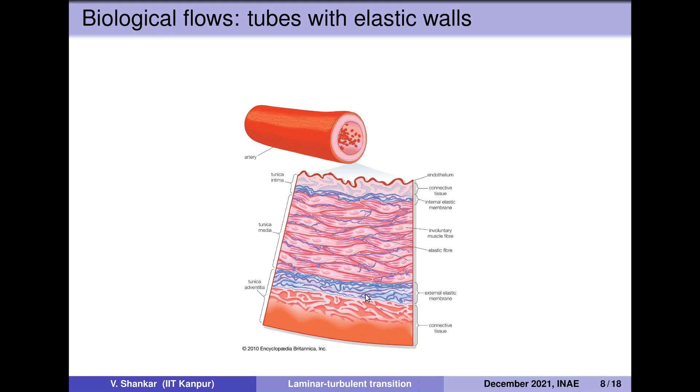The key idea here in flow through deformable tubes is that there are new modes of instability that are induced due to the deformable nature of the solid wall. Our research, carried out in our group in the last 5 or 7 years, has shown the importance of rheological constitutive modeling of the deformable solid in accurately predicting the transition in flow through deformable tubes, and we have developed a consistent Eulerian and Lagrangian formulation of the coupled fluid-solid problem to accurately predict flow stability.

Thus, in contrast to Newtonian flow through rigid pipes, when you consider either flow of viscoelastic polymer solutions or flow of Newtonian fluids through an elastic soft wall, both fluid and wall elasticities render the pipe flow linearly unstable. This is one of the main takeaways that I would like to convey through this talk: that either fluid or wall elasticity can make the pipe flow linearly unstable.

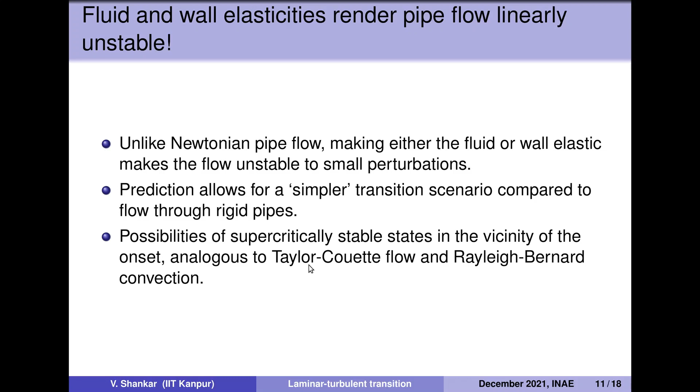Here is a more recent experimental observation from Bjorn Hof's group again, and here they show that there is very good agreement between our theoretical predictions, shown in these blue and red curves, and the black dots, which are experimental observations.

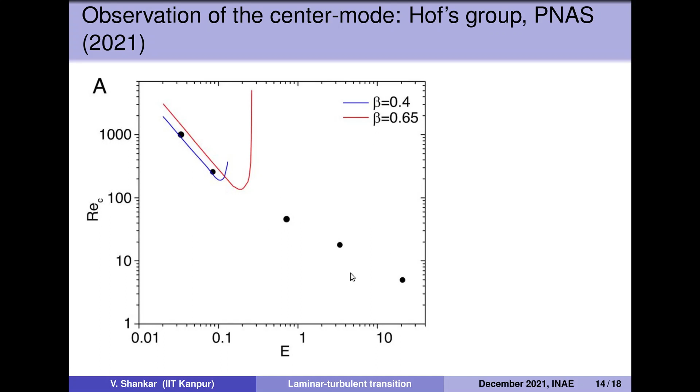The theory agrees well with experiments at low elasticity numbers, but at higher elasticity numbers, theory does not predict instability, yet the flow nevertheless becomes unstable in experiments, suggesting that in this elasticity regime, the flow becomes unstable due to a subcritical mechanism.

And there are very interesting future directions in which one can take this discovery forward.

For example, in Newtonian shear flows, the turbulent state is disconnected from the laminar state, whereas we have shown that in viscoelastic flows, there is a continuous pathway from the laminar state to the turbulent state. This could have major implications in understanding the so-called maximum drag reduction regime.

And the key question that can form an important area of future research is: can the linear instability that we discovered evolve directly to the MDR state?

There have already been some developments in this regard, wherein researchers from Cambridge have used the linear eigenfunctions from our study to continue the solutions to nonlinear coherent structures.

And there are interesting takeaways even in the limit of very small Reynolds numbers, where there are instabilities in flow of polymer solutions. In the context of flow past deformable solids, our research has focused on the development of a consistent formulation for understanding stability of fluid flows.

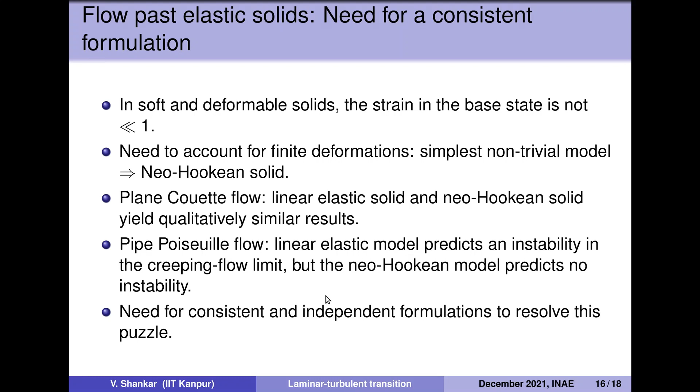We use the simplest non-trivial model that accounts for it, namely the Neo-Hookean solid in continuum mechanics. If you do this analysis for plane Couette flow, both linear elastic solid and Neo-Hookean solid yield qualitatively similar results. But when we carried this out for pipe Poiseuille flow, the linear elastic model predicts an instability, whereas the Neo-Hookean model does not. So this points to the need for a consistent and independent formulation to resolve this.

So we developed a consistent Eulerian-Lagrangian formulation, and we showed that there is indeed no instability for flow in a deformable tube in the limit of low Reynolds numbers if you use the Neo-Hookean model. But if you use the Mooney-Rivlin model, that may show an instability.

This suggests that the flow stability is highly sensitive to the constitutive nature of the solid, especially at low Reynolds numbers. Some of these discrepancies also continue to higher Reynolds numbers. So our work suggests that one has to precisely characterize the nonlinear rheology of the solid while comparing theory and experiments.

And unlike rigid solid surfaces, where plane Couette and tube flows exhibit qualitative similarities in linear stability, here there is no such similarity, because there are drastic differences between stability of Couette flow past a Neo-Hookean solid surface and flow through a deformable Neo-Hookean tube.

So with this, I would like to end my brief presentation, and I thank you for your kind attention.

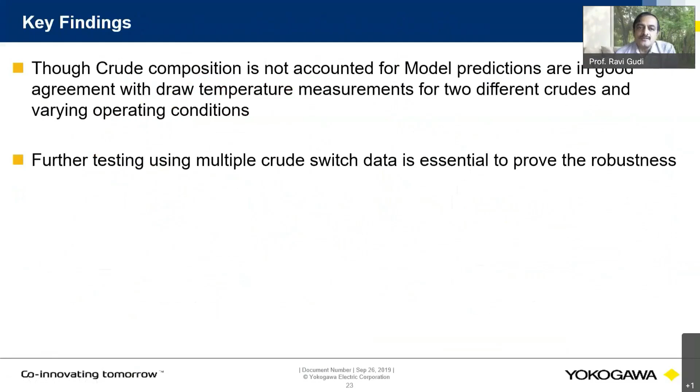Let me wind up my presentation with a quick note of gratitude and thanks to the INAE for inducting me as a fellow. I really look forward to all the very exciting interactions that I propose to carry out with the scientists and engineers at the INAE. Thank you very much. Namaskar.

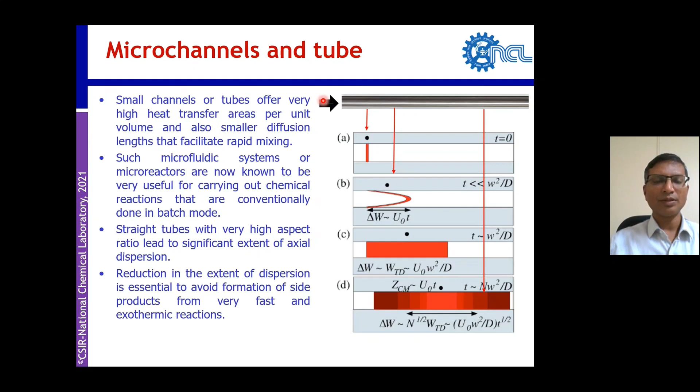Here I'm going to give you two examples of two different novel reactors that we developed in my group. The first is called pinch tube. Pinching of straight tubes happens very easily—by pinching from two sides, you get a depth. The pitch between successive pinches can be one design parameter, and the angle between successive pinches is the second design parameter.

Pinching reduces the reactor volume by around 6 to 8% without reducing the heat transfer area, which is very significant in terms of the usefulness of a simple tube as a flow reactor. It has the potential to be used as a high throughput flow reactor because the small reduction in area also helps in locally increasing the pressure gradient, and for two-phase flow, it pinches at the point of pinching and you get fine dispersions beyond the pinch points. You don't need just one pinch point; you can have a sequence of them.

We evaluated the efficacy of this design. Initially, in a glass tube, we made a pinch tube and studied it at different flow rates for mixing of two fluids. In a small tube of around 4 millimeter diameter, at flow rates from 10 ml per minute to 60 ml per minute, even at 30 ml per minute, by the fourth or fifth pinch, mixing was complete, which was not possible at low flow rates or at earlier pinches. For straight tubes, it would take a really long time and long distance.

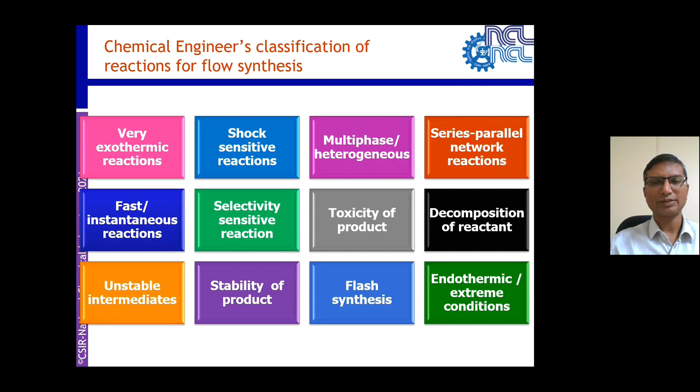As a chemical engineer, when we look at these kinds of reactions and where we want to use reactors for carrying them out, we tend to classify them in a relatively simple manner. Although chemical reactions are classified based on nucleophilicity, aromaticity, the substitution that happens, etc., for us it becomes important to monitor reactions in terms of rate of reaction rather than what is getting formed and how. So rate becomes more important. The best way to classify these reactions is, as shown here, like very exothermic reactions, shock sensitive reactions, multi-phase reactions which are mass transfer limited, and so on.

We have a few set of questions that we typically ask when we do any reactions, and collaboration with organic chemists is a must. We try to classify the reactions in terms of their kinetics - whether they are fast or slow reactions, exothermic or endothermic reactions.

We classify reactions in terms of their thermodynamics, number of phases involved, the reactants, products, stability of individual components, reactivity, and so on. Then we ask: why should we make them continuous? If the answer to any of these points is yes, meeting certain requirements, we must move into continuous processing.

I'm going to show you two case studies. The first is of a drug, Ivacaftor, the world's most expensive drug, used for treating cystic fibrosis. This was done in collaboration with one of my organic chemistry colleagues, Dr. D.S. Reddy, where the key step was an ozonolysis. Normally, when you do ozonolysis in batch mode, you have to do it at minus 78 degrees centigrade in the presence of large quantities of solvents.

Here, we made them all in continuous mode at minus 10 degrees centigrade, with a reaction time of just 1 second. Subsequently, we arranged to remove the excess ozone and oxygen, which goes to a scrubber. The product, along with any quenched ozonides, goes to the subsequent reaction. Depending on reaction kinetics, we optimized reactor sizes, volumes, and conditions to get maximum yield at each step. We set up a continuous facility for synthesis of this drug and were able to make almost 10 grams every day, meeting the requirement of treating almost close to 5,000 patients every day.

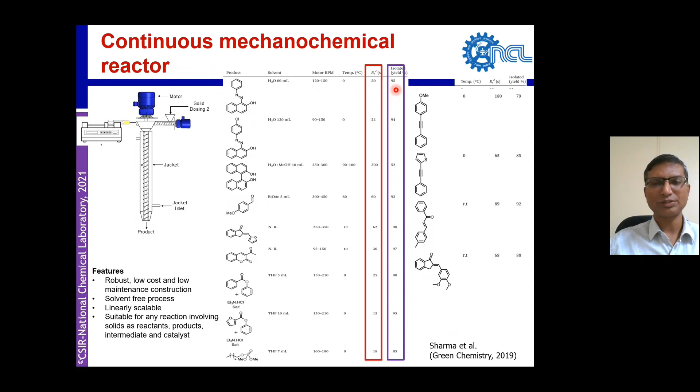This is a very important area, because on average, as a country, we import 65% of the solvent that we use. So if we are able to reduce that solvent quantity even by 10% or 20%, it will be a significant import substitution, and it will also make our processes more efficient with smaller footprints.

The last case I'm going to cover is a continuous process for silver nanowires.

We started this work almost 4.5 years ago, looking at whether we could make these expensive materials in flow. These materials have many advantages for solar cells, displays, sensors, printed circuit boards, magnetic devices, flexible electronics, and so on, and their overall turnover is going to increase significantly over the next decade. Considering the flexible electronics space, we thought we should enter this domain.

A typical batch protocol needs silver nitrate in ethylene glycol. We add PVP as a capping agent, and a halogenated salt as an etching agent, which facilitates growth in one direction. Temperatures are always above 120 degrees centigrade, and a typical batch reaction at a few milligram scale needs around 180 minutes.

We understood the reaction kinetics and mechanism. The reaction starts when the solution is pale yellow and moves towards a silky grayish color at the end. Depending on the operating conditions you keep, you can produce rods, a mixture of particles and wires, or only wires.

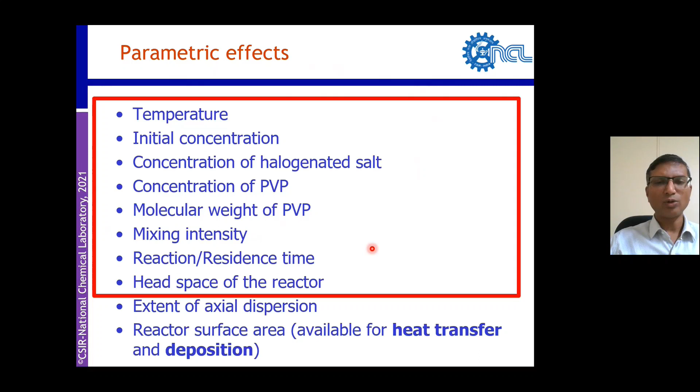A few parameters become important: temperature, initial concentration, concentration of halogenated salt, etc. All of these have to be controlled to make sure you get what you want. Now, what do we want? We want complete conversion of the limiting substrate, that is silver nitrate.

It's an expensive material. Second, we want to control a narrow distribution of nanowire diameter. We should have a sufficiently large aspect ratio, excellent local mixing while overall acting as a continuous plug flow reactor, and isothermal operation so the reaction progresses everywhere in the same manner. There should be no or minimal deposition on the reactor wall, because any deposition is loss of material.

We studied it in detail and understood every parameter. We developed systems with 42 different types of reactors and finally optimized one. Recently we demonstrated this and have now licensed this technology to a company. We were able to make really large quantities of this material, and its value is very high, ranging from $200 to $600 per gram, depending on the size you make.

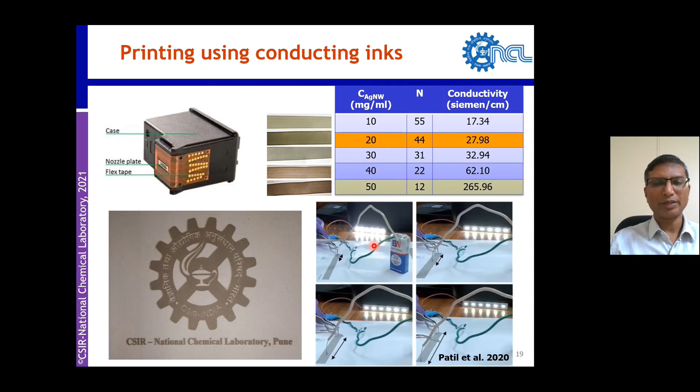We also had to check whether the material is useful, so we made ink formulations and put them in a simple inkjet printer. We printed different patterns on paper and checked whether those printed patterns are really conducting. If I connect two ends of the printed pattern anywhere on the paper surface with a strip of LEDs, the LEDs glow, which indicates the material is very, very useful. We have now taken it to pilot plant scale, and we also developed many other processes at the pilot scale.

We start with the reaction kinetics, then do systematic reaction engineering, identify the right devices or reactors, and study the transport phenomena in those reactors. Then we go for design, demonstration, optimization, and scale up. This is the entire cycle we follow for every single system or reaction.

To summarize, continuous manufacturing is the most optimal way of exploring chemistry and easily translating it into a feasible process. Every chemistry needs different attention. Engineering challenges are there and must be tackled by systematic approaches. Classical reaction engineering is important and needs to be refined to make it relevant at all scales. High value, low volume chemicals and materials are the new areas of investment in the chemical industry, where we must move. Thank you very much again.